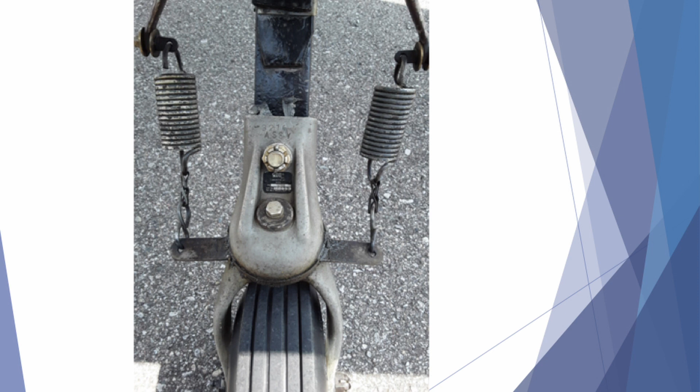Okay, so we're going to start back at the back of the airplane and kind of work our way forward on some of the items you need to keep tabs on and stuff that we've run into that's not really written in books anywhere. The tail wheel, the best one that works on the 108 is a Scott 3200 or an Alaska Bush Wheel 3200, either or.

And you notice the castellated nut holding it to the leaf spring. It's upside down from what the FAA teaches you. They want the nuts on the bottom. Well, according to the parts manual, according to Univair, the assembly drawings, that's how they want it. They want the castellated nut with a cotter pin on top so you can see it on a pre-flight. And where everybody else's has got a grease zerk up on that top cap, you see the head of the bolt. The best way to make a Scott 3200 work well is don't grease it.

If you pump it up full of grease, it's going to get too slippery. The clutch plates won't have any friction in them to dampen the tail wheel. So you get a lot more shimmy if it's over greased. What we do is about every second or third annual, it's up on milk crates anyways to get the tail up in the air to make sure everything is tight back there. We'll just take the wheel off, take that nut off, clean everything all out, blow it out nice and dry, and put a thin film of Lubriplate on it, put it back together, and leave it alone. And it just doesn't give you any trouble.

The springs have to have some play in the bottom. If you go out there to the airplane and both of the springs are under tension, then what it's doing is it's pulled the lock pawl loose, and your tail wheel isn't a tail wheel anymore. It's like a caster on a shopping cart. The whole concept with it is you got about 15 degrees travel either direction using your steering with your rudder pedals. Any more than that, if you want to break the tail wheel loose, you hit the brake and lock it up hard, and then it'll kick it off center and release it. But you want it to stay in trail when you taxi. Otherwise, it's a nightmare with a crosswind.

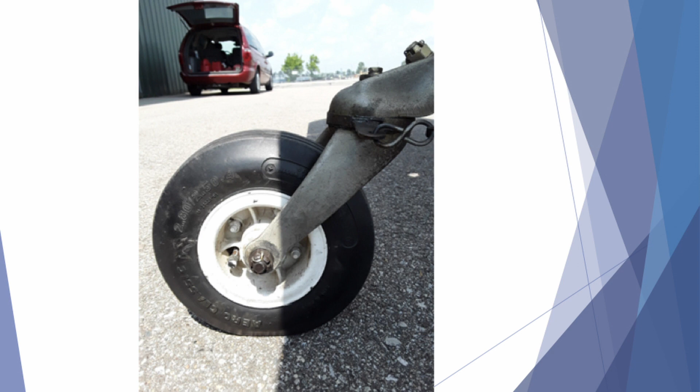The side view of it, you can get two tail wheel tires right now. The McCreary Chenuit, it's a sawtooth pattern. It's a real thin wall. They don't do well on a big tail on a Dash 3. You got to put 60, 65 pounds of pressure in them. If you get them down to about 40 or 45 pounds, it'll blow the sidewalls out of them.

This tire Desser Tire makes, if we back up, if you look at the tread pattern, how it's just the rib pattern like the main tires, that's the heavy duty tail wheel tire. Desser Tire out of Memphis sells them. They're about 10 bucks more than the cheap McCreary. On a small tail, you could damn near run it flat, not have any air in it. It's that rigid a tire. But I've not seen anybody blow one of those out on a Dash 3. It's got Desser's name on it? No, Desser sells it. Okay. You can look online on their website and you can see the tire options, and the Chenuit McCreary is about 10 bucks cheaper than that one. But it's a much better tire.

Dave, on my inner tube, the nipple is, I have to use a screwdriver to pry it back so I can get air in it. What did I do wrong? Did I put the wrong inner tube in there? Not really, they're tight on all of them. You got the little 90-degree stem that comes out of there, but there's not much room. What a lot of guys will do is when they're going to put air in the tail wheel tire, they'll put one of the extensions on it, hit it, and then take the extension off, put the cap back. Right, okay. Yeah, it's real tight to get a tire chuck down there. It's not uncommon to have to pry it over with a screwdriver and hold it while you put air in it. Okay.

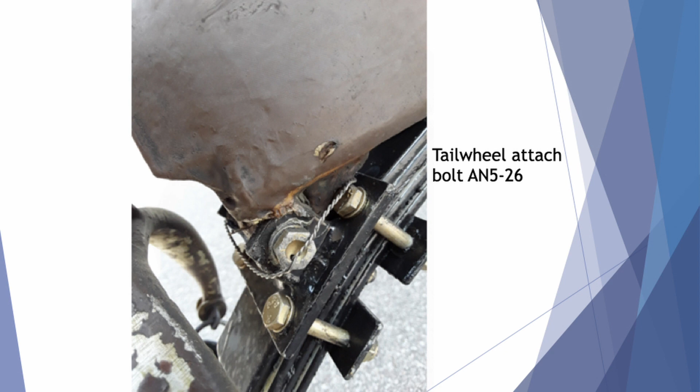Tail wheel attach bolt, an AN5-26. The manual calls out for a 25. The problem with that is the bolt has got no washers under it, so when you push the bolt through, the edge of the threads are right at the steel bracket, and it's like a meat cleaver trying to shear it. So by putting one size longer bolt in there, the 26, it gives you the room where you can put a washer on either side of it, and it gets the threads out of the way of the shear point area. Dash 3s are bad for it.

With that long arm and the big tail, you get a good crosswind. Imagine the side load you're putting on that little 5/16 diameter bolt. So what I did with it is I put the longer bolt, it's got the bushing inside. The trick with it is when you put it on there, the bushing inside is slightly wider than the gap. You put AN960-6 washers, a thin washer, thick washer, to shim it to where there's no gap where it won't slap side to side. If there's any play in it sideways, when you put a side load on it, it's just accentuating the arm and moment, and you'll pop the head or pop the tail off the bolt.

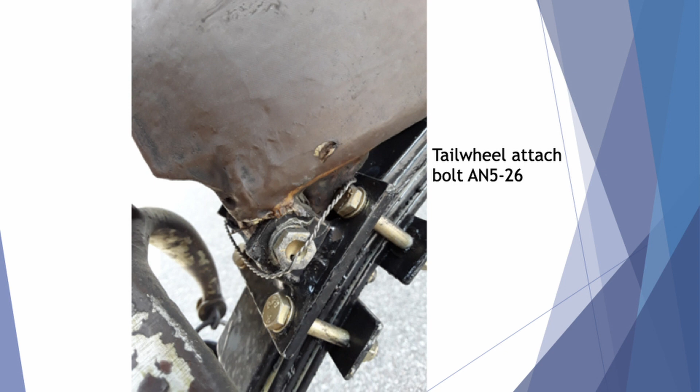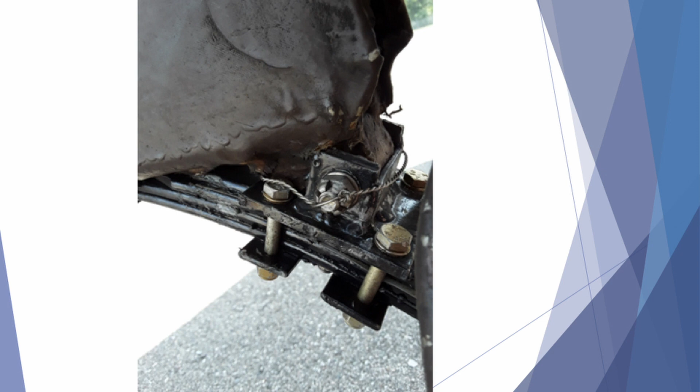The other trick that we figured out was if you drill the head, that's supposed to have a castellated nut on it, not a lock nut. So if you drill the head, you capture it through the head, start out on the side where you got the tail, go through there with safety wire, come all the way around, go through the head of the bolt, and then come around it and capture it back with the tail. So you've safety wired it completely with a ring like this.

So you go out, and if you pop the head on that bolt on takeoff, you're going to catch it on your next pre-flight walk around. You'll see it busted off there because it's held with a safety wire. And the safety wire being captured, it won't let the bolt come out of the hole, so your tail wheel is going to be there when you land. And yes, they have fallen off. We've had people call. The amazing part is, since we've been capturing them like that with a safety wire, we've never broke a bolt.

I just passed it around. You guys can take a look at it.

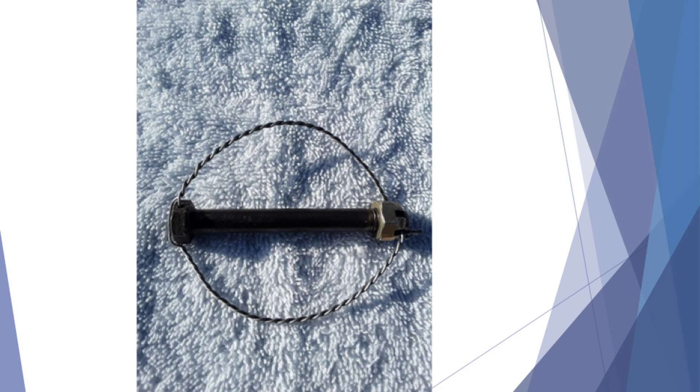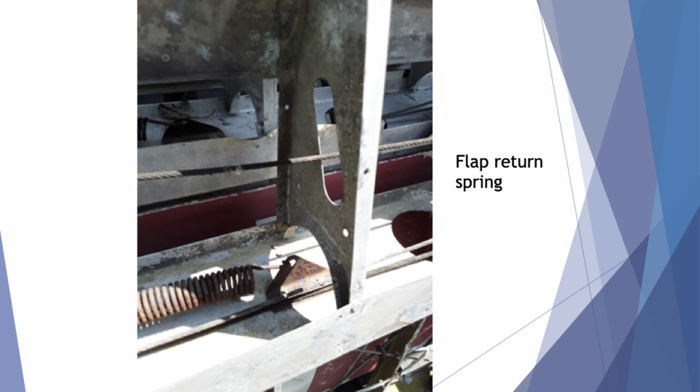Some of the areas when we're doing the annual that people don't look at: up in the wing behind the fuel tanks, you got a flap return system in it. There's a big giant spring. There's usually an inspection hole where the bell crank is for your flap rod to come out. You look in there with a light. The early Stinsons, 108, 108-1s, they were not forgings, they were weldments, and they just had a hole drilled in a piece of steel with the other end of that spring stuck through there. Well, after 75 years, the hole gets elongated, it saws through the spring. That's an area you want to keep an eye on.

Just go up there every annual and shoot some engine oil on it, just so it stays lubricated where you're not rubbing metal to metal all the time. If you get it to the point where it's sawed through the spring, it's an absolute bear to change. The other end of that spring is buried behind the fuel tank. There's no inspection holes there, and it's 24 inches from the fuselage. So you end up having to cut a hole back there, making some kind of a tool that you can pull the spring from the root end of the wing to draw it tight to get it up into the hole. You can see that through one of the holes with a borescope to see how the inboard end of the spring is holding up.

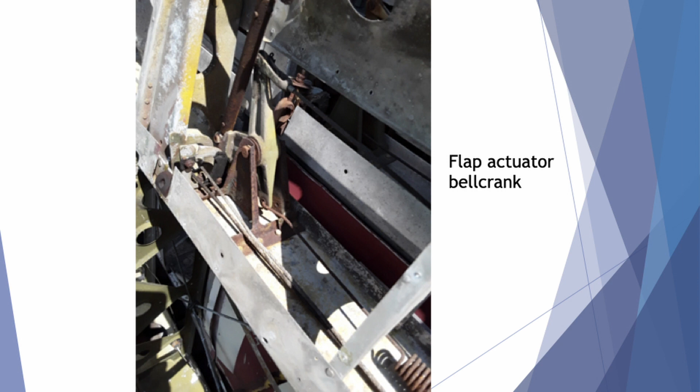Another area that's real common for corrosion. Back in the day, the airplanes used to be tied down out in the grass because there were no hangars. And like with every other tail dragger, the last 3 feet of the airplane was exposed to all the dampness coming up out of the ground, so the tails all rotted out of them.

Another area, a low spot, is the cluster right at the landing gear where the brackets are for the wing struts. So pull the streamliner fairings off when you do the annual and get in there and look for rust. It was bad enough back in the day that Univair made a whole cluster kit. It's like, hey, this thing is rotted. You'd buy it and it had about 12 inches of tubing already welded to it. Cut it out and section it in. They knew right where it was going to rot.

Most of the airplanes have been restored, epoxy primed, painted, kept in concrete hangars, so we don't get near the corrosion that you used to have with the airplanes. They're in a much better environment when they're not flying.

If you're ever going to go out and do it, is anybody in here looking at buying a Stinson? Everybody's already got one that wants one? Okay. Aren't we all looking for another one? No. Okay, all right. How many guys own a Stinson? How many guys have another project? There you go.

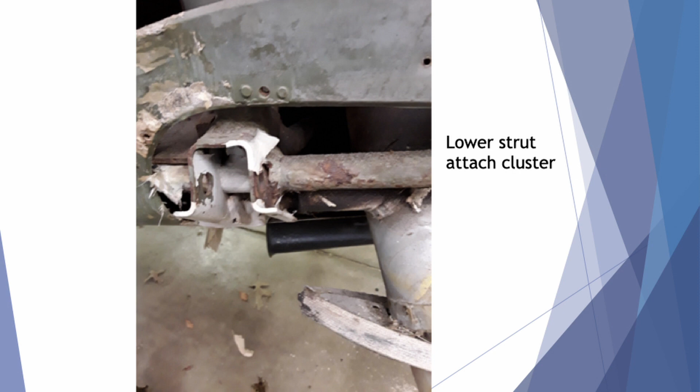AD note on the Stinson on the rudder cables on the pulleys. Originally they had a small 2-inch diameter pulley up under where your pedals are. Get that streamliner fairing off the landing gear and it's easy to see. Easiest way to tell, other than getting a tape measure and measuring it, they just went to a bigger diameter pulley. It's actually a Piper service bulletin for compliance. Piper took Stinson over in '49. The bulletin and the AD note came out in 1950, so that's why it's got a Piper part number for the service bulletin.

What they did is the small diameter pulley had a fairly tight radius where the cable changed direction. They had a tendency to wear in there. If you change that pulley, do you also have to change the cable? No. The cable's got enough play in the ends for the threaded turnbuckles where you can adjust it out. If you're gonna go buy an airplane, or you've got your airplane and you look in the logbooks and somebody signed that off, physically go look at it. I've seen 3 or 4 of them where the AD note's been signed off and they've still got the original pulleys in them.

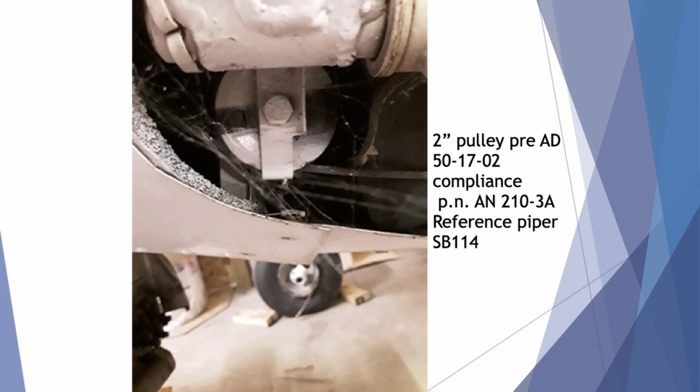Landing gear leg bracket. How many guys have ever broke these in their 108s? Almost everybody. You take it out and get somebody to weld it, or you pay Univair another $100 for another piece. I got tired of doing that, so I made one. Well, I didn't make it, because you can't manufacture a part, but I repaired it. Pass that one around. I did that probably 15 years ago, haven't broke one since.

I took the original bracket, used a real long stainless steel worm gear clamp, cut sections out of it, laid the old one out as a template, and then bent a new one out of the spring stainless steel and put floating box nuts on it with machine screws. So it's not rigid mounted, it's got a little bit of give to it, and I haven't broke one since.

Putting the new part on wasn't as irritating as trying to line it up and get the holes where they used to be. Yeah. I don't care how close you are with a Sharpie and putting marks, it just doesn't work. This one I actually went over the top.

I countersunk the inside and put screws on it that are slightly extended into the clamp, so when it's torqued up to the tube, if I did break one of the legs, I don't even have to take it off the airplane. I just undo the nut. There's enough friction there to hold the head of the countersunk screw.

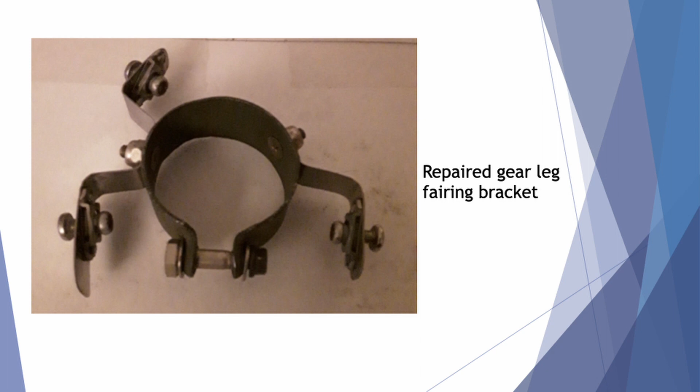Fabric covering over the gas tanks. Does anybody run into that? It's not illegal. Contrary to what people say, you can have fabric over the gas tanks. The AD note only applies to the Dash 2 and the Dash 3. Univair couldn't tell me why it didn't apply to the straight 108 and the 108-1.

You can put a 540 Lycoming and a small tail, go faster than any of them, but the AD note doesn't apply. Doesn't make any sense. But you can cover the top of the gas tanks. You cannot do it in a sock, one wing cover.

You have to cover the wing, have the fabric go down the bays with the gas tank out of the wing, go down, you attach it with the Pliobond, super seam cement, whatever you want to use for your covering process. The fabric has to be glued down into the trough around the spar, and then you put the tank in that actually holds the fabric in place. Then you can cover over the wing if you want it to look like it's a fabric covered wing.

What they were concerned about was if you just did the blanket method over the top and the gasoline got underneath the filler neck hole and lifted the glue, the fabric comes up off the wing and it changes the airfoil. Now you got a thick wing on one side that's all inflated, and you got a normal wing on the other side. There's also the chance of the air getting under there and eventually tearing the fabric loose of the wing.

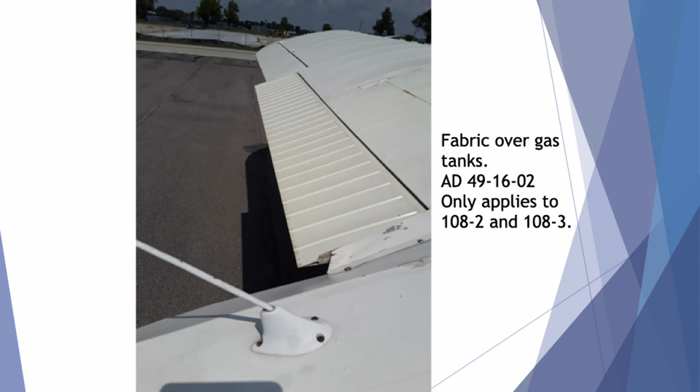So this way, if the fabric did depart the airplane, it's not going to make any difference because the structural part of it is all trapped by the gas tank. You don't have to disassemble anything to look. You can look through the inspection holes in the bottom of the wing, and you can see the trace of the fabric that's coming down and around the lip that's been glued in there. I think yours is that way, isn't it? Yeah.

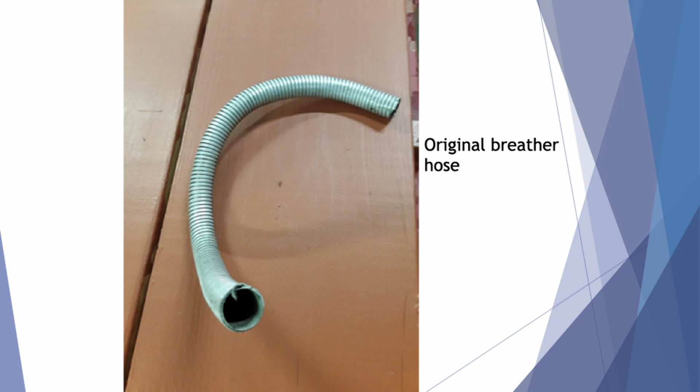Anybody got the original corrugated aluminum breather tube? Do you constantly get a little bit of oil weeping at the back of the engine? I get it dripping on the top cover where it comes out. Yeah, the breather's got oil residue going through it. That's porous. That's not a sealed tube. I don't know why they ever did that.

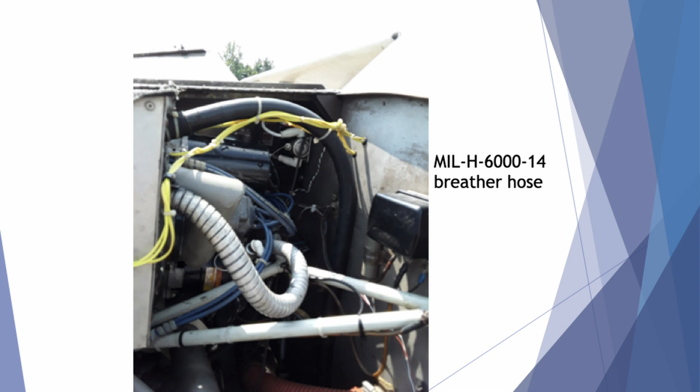That works really well for a blast tube on the generator, but that's about it. People chase oil leaks, and that's usually what it is. You run your fingers along the bottom of that tube and there's always oil there. Fix for that is MIL-H-6000-14, 7/8 ID breather hose. Get about a 4-foot length of it from Spruce or any of the vendors.

And the other trick with it is most people have the breather tube come out of the breather cap, through the baffling to the firewall horizontally. Well, the oil can't go uphill. So when you put the new stuff that's sealed, it doesn't weep, and you run it up just about to the point where the upper cowling touches it, it's going uphill. That's going to knock 90% of the oil off the belly away.

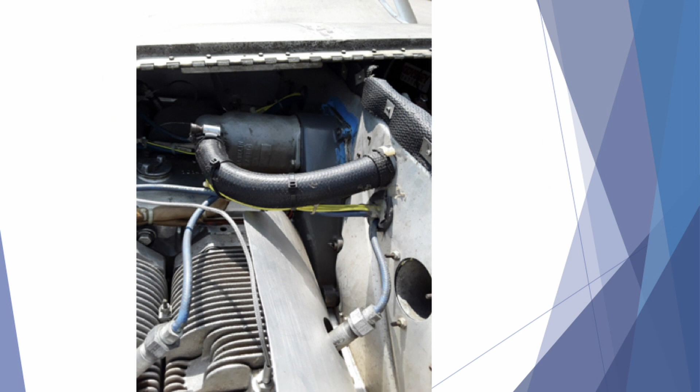That's the front coming off the breather cap. You can see how it's already going uphill when it goes through the baffle.

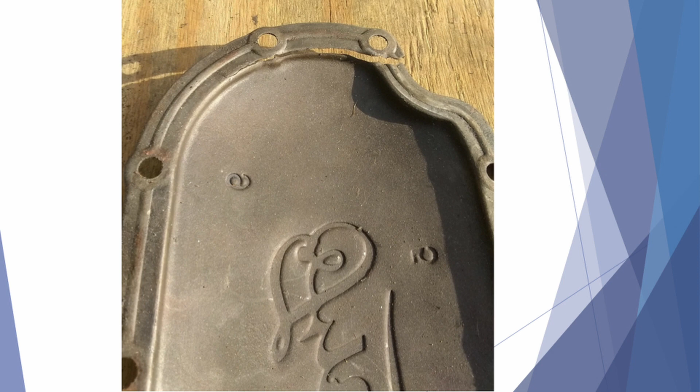A lot of prop seal leakage. People call up, need a prop seal. And it's like, well, where's it leaking? Well, it's on the windshield. How do you know it's a prop? Because the whole top of the engine's wet. This is an extreme top pan cover that we had come in. I've found them where we actually could not find the crack on the airplane.

If you think you got a prop seal, before you take anything apart, blow the top of the front of the engine off clean, take some white paper towels and duct tape them over the front section of it, and go out and fly the airplane for 20 minutes. Can't do it for 10 minutes because it doesn't get hot enough to open the crack up. We found this out. Go fly it for about 20 minutes, get it to operating temperature and heat soak.

The crack will open up, and you'll see the back of the paper towel is wet, the outside of the paper towel is dry. It's not your prop seal, you got a crack in the front pan. It's real common with them. We've probably changed a dozen of them over the years. Not quite this extreme, but they were the die marks from the stamping. It was a real tight corner, and eventually they just fatigue and they crack up there.

That was on an airplane we were working on, and he said he'd been chasing an oil leak for a year. Wow. But if you look at it, that hole where the pan gasket goes up underneath it, even if you have the silicone gasket, the crack is beyond it. So it's still gonna weep. But normally we'll see them where they're cracked about 2 inches, and we've taken them off the engine and you heat them up with a heat gun and you can actually see the crack open up.

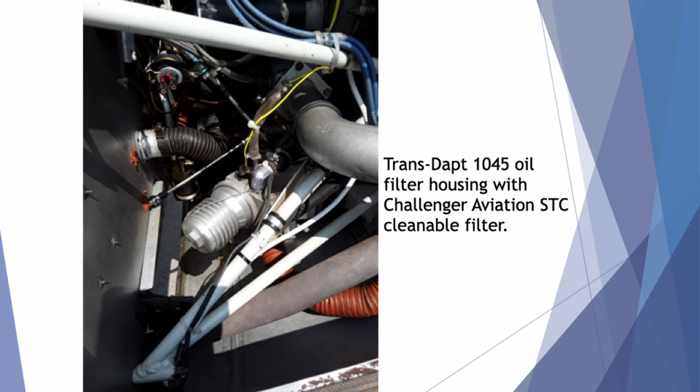My airplane has got a full filter system on it. I came up with it about 30 years ago, long before Airwolf was in existence, and Turbotech and Seaplanes Inc. had all gone bankrupt, so there was nothing out there. So I got a field approval putting a Trans-Dapt 1045 race car adapter on it. Guys are still putting them on. Jegs Racing sells the Trans-Dapt housing for about 45 bucks a piece. By the time you buy the fittings and the hose, you got about $250 in parts for the filter kit. So there's absolutely no reason you shouldn't have a filter on your airplane.

Takes a standard 3/4-16 thread filter, CH48108 or 109. About 5-6 years ago, Paul and I put the Challenger Aviation STC cleanable filter adapters on it. Spins on the same housing, same thing, did it with a field approval. A couple of the guys have asked Challenger to add the Stinson to the STC list. They can't do it because all the STCs that Airwolf has, and it's an airframe modification. All the STCs for the Challenger Aviation system are all engine mounted adapters.

Like if you got a Continental O-470, you take the spin-on filter off the engine, put this on it. It's an engine STC. By having a remote filter that was never part of the type certificate data sheet, it's an STC product. That's an airframe modification, so they can't add it to their engine STC. But the guys have been doing it with no problem with the field approvals. As long as they get one that's previously been done by the FAA, get them a copy of the 337, and their FAA seem to be good with it. It's always been a PMA part, just not STC'd for that application.

If any of you guys are looking to improve your engines, put later model parts in it that we'll get into in a little bit. If you ever run across a helicopter engine core out of the Army, most of the parts in that will fit the 165. Some of the stuff fits the 150. The heavy connecting rods, the heavy rockers, the sodium cooled exhaust helicopter valves, all the bulletproof parts that you can put in a 165 to make it a better engine, they all come from that engine.

So if anybody ever runs across one, out of a vocational school somewhere, somebody had one laying in a building somewhere, and you can buy it, the cylinders, the crank, and the case will not fit. Everything else does. They're all the same parts. It's just that's all the later model parts. They're all the updated stuff.

What are we gonna do here, Brett?

There we go, thank you.

So they're 6V335 or 6V4200 is the designation on the data plate.

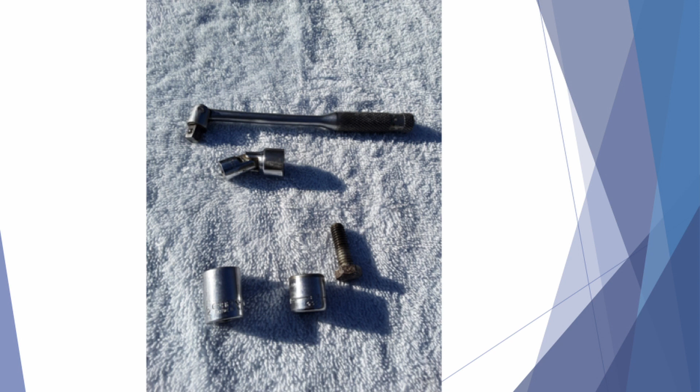We'll talk about some of the tools. How many of you guys work on your own airplanes? Yeah, most of you, okay. I know, you got a Lycoming, you don't have to work on it.

There's a handful of special tools that you need to do the normal maintenance, like upper end maintenance, I guess you'd call it, on a Franklin. Intake manifold, the bolts are buried. You can't get up there with a normal socket and a normal wrench. Snap-on makes tools that will fit up there just like they're made for it. The quarter-inch flex socket, half-inch, a breaker bar.

You can take a half-inch Craftsman socket, grind it down so it's a shallow socket. That's pretty much all you need to get the manifolds on and off. Without them, you'll fight with it for 2 or 3 hours. If you got the right tools, 5 minutes, it's off or on. Simple.

That short socket, yeah. There's nothing special about it. A 6-point Craftsman, grind it down as shallow as you can get it. You grind it down to where the head of the bolt is in the socket and you have no more material beyond it, just so you're getting a full grip on it. And that's just about the right depth.

That's how it goes up into the manifold. On the right side, you got a breaker bar with a little short socket to break them loose. 12-inch extension on that quarter-inch drive flex socket. It rips the bolts right in and out of there.

Lock washers. You got star locks and then you got split locks. The factory manual calls out for the star washers on the right. They work well in most applications. On the intake manifolds on a Franklin, they're not worth a hill of beans. Pass some of these around. The split lock washers have a better grip.

There's no steel washer or anything except the head of the bolt and that star washer going into an aluminum casting. The heat and contraction cycles and the vibration, they come loose to the point where when you change oil at 25-hour increments, you go around and look to make sure the bolts are all still in there and you hit them with the socket, check them for tight. Since we started using the split lock washers on it, we've never had one come loose. We don't even think about it anymore.

When you make contact with that washer, you've got to go almost a full revolution on that bolt to get it to bottom out where you're tight. So the star washer, it'll vibrate to the point where it'll chew little knurls into the manifold and it's loose, which causes the most common roughness in a Franklin, an intake leak.

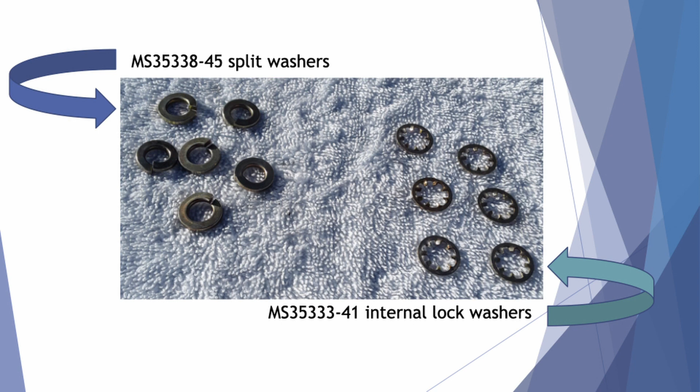Lisle Tool made a push rod remover tool for Franklin. They called it for a big block Ford lifter, but it just happens to fit a Franklin. Jegs Racing bought the tooling. There's one if you guys want to come up and look at it. It's a slide hammer. It's got an expander on the end of it. You put it inside the lifter tube, turn it about 3 turns till it's snug, and the slide hammer just pops the push rod tube out. You don't damage anything. And they only get about 35 bucks for it.

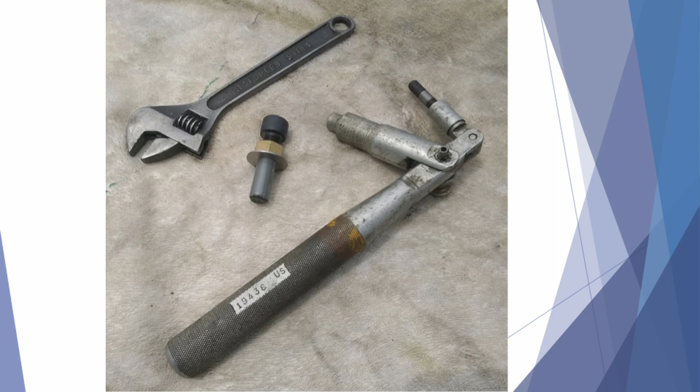Everybody's talking on the website about getting factory original tools to work on their engine. That's all wonderful, except the factory tools were built for the military. I'll pass this one around. Weighs about 4 pounds. You want to carry this in the airplane in the toolbox? This is the official Franklin push rod tube installer. Threads onto the rocker stud up at the top. Use mechanical leverage, pushes it in. But it's heavy.

This is a 1/2-inch bolt with a stainless steel washer and a nut. Weighs probably a couple ounces. It's about 7 bucks in parts. I got a bunch of them here. I get 10 bucks a piece for them. That and an 8-inch adjustable does the same job as that. You can throw it in your toolbox.

Jack Stewart's coming. I think he's supposed to do stuff on lifters and push rod tube installations. I'm going to give him one of these and he can show that as well.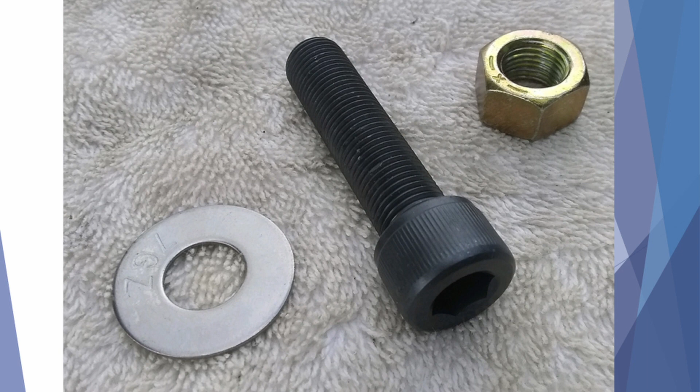That's what it looks like disassembled. Real simple. What we do is we get the socket head bolt. We found one that was just the right diameter, put the nut and the washer on it with a piece of shrink tubing. The shrink tubing protects anything from scratching the inside of the pushrod tube shroud, and it just slip fits in, absolutely perfect.

Put the pushrod up, drop it in the hole, use the adjustable wrench, adjust the jaws to 5/16 to match the diameter of the stud that holds the rocker in. You just use your mechanical advantage, it just pushes it right in, simple.

The tool on the right is the original factory pushrod remover. Really, really complex. That Jegs Racing tool does the same thing. A lot of the guys have gone beyond that, and they cut the T-handle down and just put it solid to the point where they can put it in the pushrod tube, and they just use an adjustable wrench over the rocker stud and use the mechanical advantage and pull it out. Then it's a real small tool, you can just throw it in your toolbox with you. All this military stuff is huge and heavy and steel.

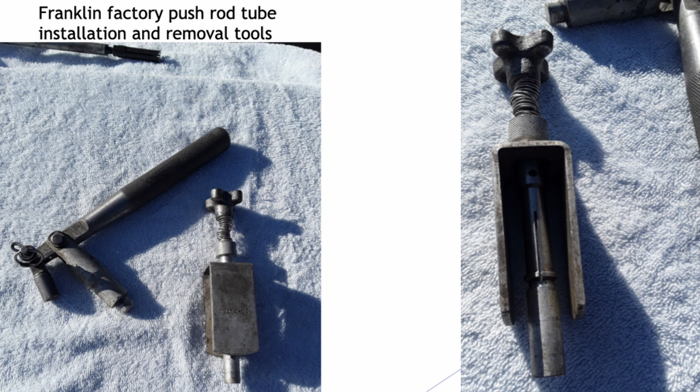This is one that one of the guys was watching us, we're messing with it last night, pulling a pushrod tube on one of them. That's what we call the holy grail of pushrod tube removers. It took me about 10 tries and I got it. This one, I machined the parts, goes in the tube, thread the center rod in, then there's another nut on top of the housing. You just run that nut down with a box end wrench and it just pulls the tube out through the center of the tube.

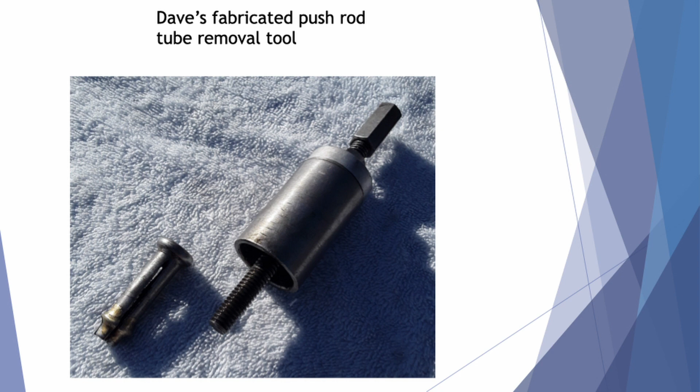Another factory Franklin tool. The guys are asking about what do you guys do about bleeding the lifters? Check the dry clearances. Well, this is the factory tool. I think it weighs about 6 pounds. A little overkill. All that does is you collapse it, put it underneath the rocker arm, between the rocker arm and the head, release the pressure, and this giant spring forces the lifter to collapse.

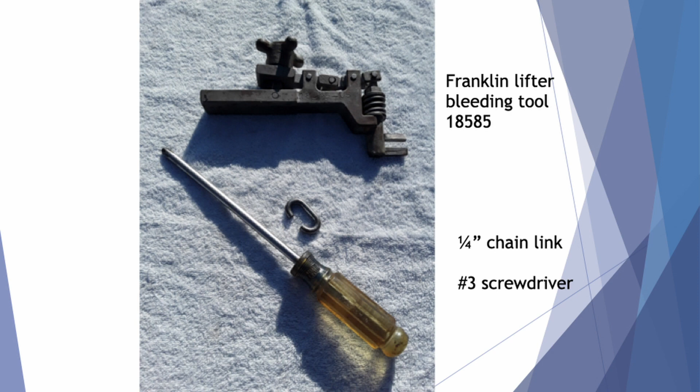It does okay. It's so big though, it won't get up under the front cylinders when the cowling's on it. 1/4-inch piece of chain link and a 12-inch #3 screwdriver does the exact same thing. Same thing, it's in your toolbox. You don't even know it's there.

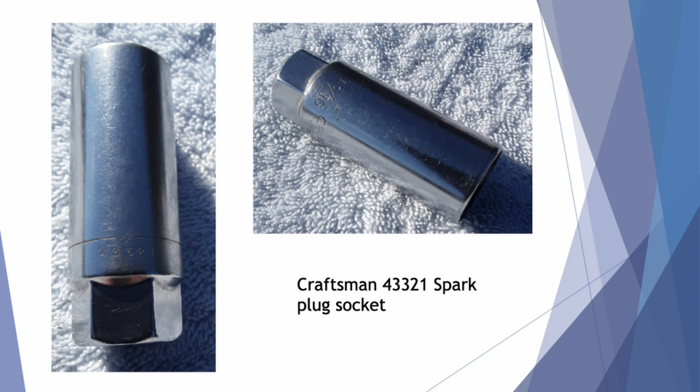Craftsman socket. It's an old part number socket. I don't even know if they're in production anymore. There's a handful up here that we've picked up. It's the only socket that we found that's deep enough reach to work on the 18mm Franklin spark plugs, but it's also got a hex at the end of it, so it'll work on that top right front one up under the grill that you can't get a socket and a wrench in. You can drop that on it, go in there with an open end wrench and crack the spark plug loose. Real simple.

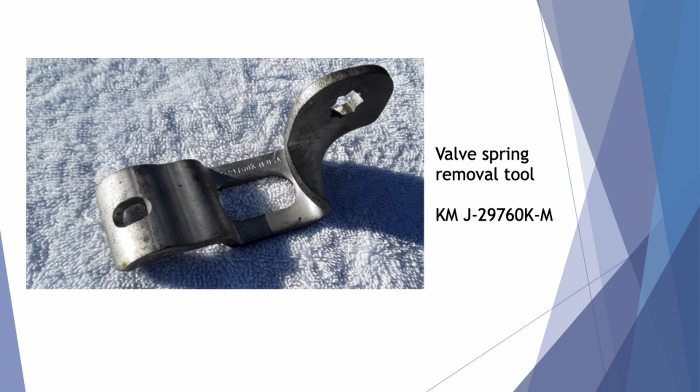We're talking about the tools. There's a lot of specialized tools for doing lower end maintenance when you get into pulling gears and pullers. All the upper end stuff, like if you got to pull a cylinder off, send it out. If you got to pull a cylinder and pull the valves out of it and have somebody grind and change them.

I got one here I'll sell you, Mark. You don't have to take pictures. Get that wallet out.

This is for a General Motors Buick V6. It just happens to fit a Franklin like it was made for it. Same. It's like Franklin made these elaborate military tools. This does the same thing. 3/8 drive. So you can just take your ratchet or your breaker bar. That gives you the leverage, goes under the rocker, and you can pull the valve springs out.

A lot of times you get one where you got carbon or something under an exhaust valve and it's like, I don't want to send the cylinder out just to get that done. The local mechanic can fix it if he had the tools. Well, that tool with a block of wood in the center of the cylinder on the vise, you can pull the valves out and he can grind and lap everything and put it all back, and that tool's like 25 bucks. All this stuff, I mean, you could get a whole set of upper end working tools to maintain that Franklin for probably $200.

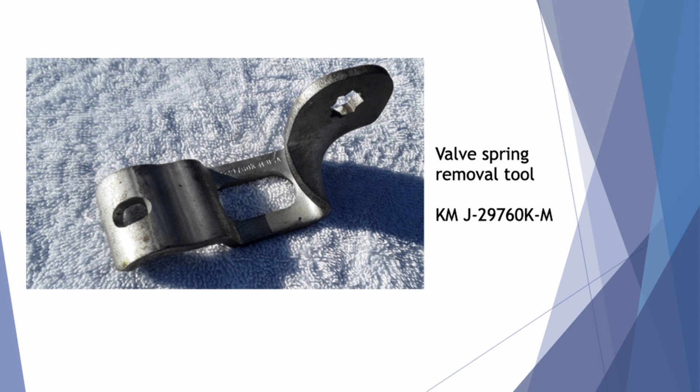Somebody made a bunch of those pushrod installers. I think they're selling that tool for $200, and it's still 4 pounds of ballast in the airplane.

Brett? Oh, there we go. We're back again. Yeah.

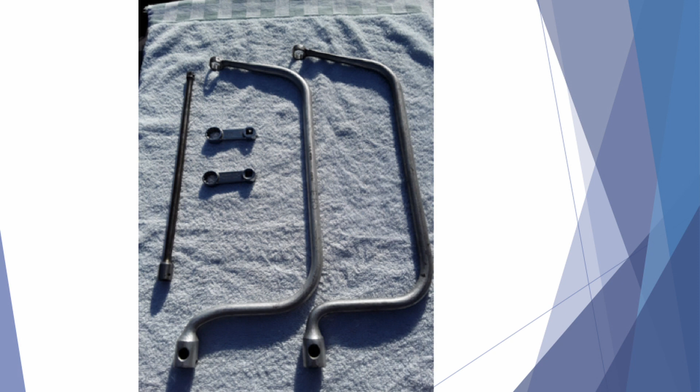Cylinder base wrenches, same thing. Everybody wants an original set of cylinder base wrenches. You can compare them, I'll pass these around. These are Snap-on torque adapters. FRES 18 and a 20, 9/16 and 5/8. This and that 12-inch extension will take any of the cylinders on and off that engine and torque them.

Those big cylinder base wrenches, proportional to the size of these, you can see. They're not going in your toolbox. They're too big. They also will not get the bottom cylinder base nuts if the engine's in the airplane. The engine mount gets in the way. Those cylinder base wrenches were designed when they were overhauling the engine and it was up on a stand with nothing else on it.

These will do the same thing. Snap-on truck gets 65 bucks a piece for them plus taxes or whatever. We've been picking them up. I've got 3 or 4 sets of them here. We get 100 bucks for the set. The cylinder base wrenches, I think they're getting a couple $100 a piece for them, but they won't work when the cowling and everything and the manifolds are on the airplane.

We're just trying to come up with a bunch of simple, normal, generic tools that you can put in the toolkit and you got everything covered. You're not trying to hunt up tools. Seems to be the hardest part with dealing with the old airplanes is not finding somebody to do the work, it's having the parts and the tools to do it.

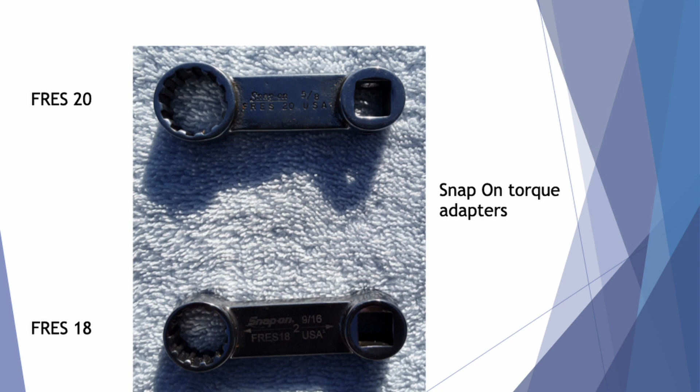How many of you guys have seen the curved wrenches? Back in the day, they were called a manifold wrench. They used to use them on the old cars. It's a Snap-on CX1820. Use that in there. That'll get any of the cylinder base nuts off a 150, 165, 180. It'll break them all loose.

It's a real thin wall. It's got just the right angle. You can use the torque adapters, take them on and off. They're plenty strong enough. This will break all the nuts loose. Then you can finger them off. The torque adapters will get you to your torque setting to put them back on again. Same thing, it's a standard off-the-shelf Snap-on wrench.

Lost it again, Brett. Oh, there we go. Keeps coming in and out.

How many of you guys have ever checked your cable tensions on the airplane? What did you use for a tool? Borrowed an expensive one. The $1,500 one in the wood box. Yeah. You can buy these for less than $200. They're designed for sailboat rigging. Little tool, works real well.

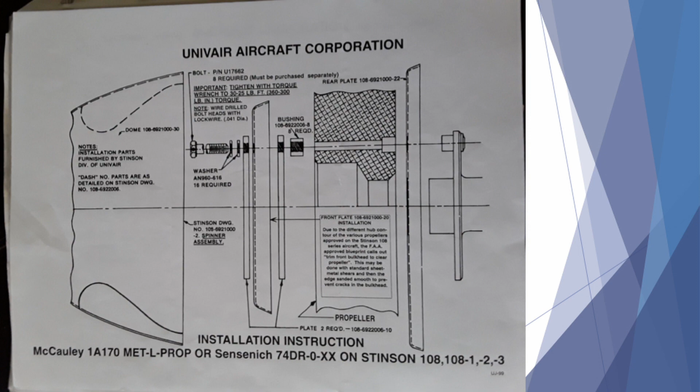They revised the drawing a while back. It used to require 51 thou safety wire to safety the prop bolts. They revised it to now 41 thousandths, which is standard wire that most mechanics have got in a box. The original service manual calls out the torque specs for the wood prop. In that original manual, there were no metal props back then. So they published this bulletin, and this is for the McCauley or the Sensenich metal props. That's the torque spec.

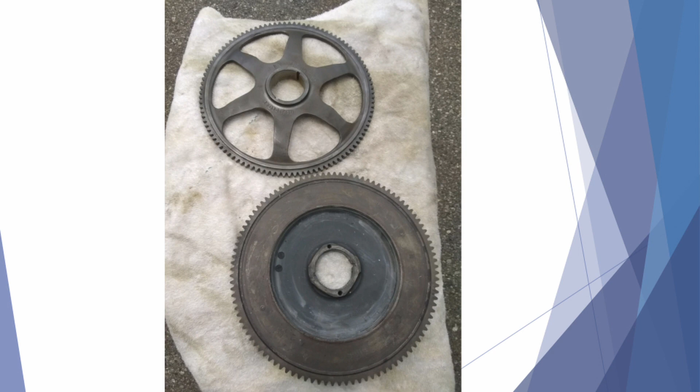Top is the starter ring gear for our engines. The bottom is a torsional absorber out of a 180 or 220 Franklin. I got FAA approval and approval from Franklin in Poland that I can put a torsional damper in a 150 or 165. You get rid of the harmonics range on the tachometer.

You'd have to go through flight testing and a bunch of engineering garbage, but it eliminated the vibration range of the metal prop. I can put feet on the floor on my airplane and sit there and go in and out of that range. You feel nothing. It's gone. Guys are talking about putting a new $4,000 prop on, doing this, go back to the wood prop.

It's been proven the wood props are not as efficient aerodynamically as the metal props for performance. The metal prop will flat out outperform a wood prop. That's why they quit building them. They went to metal. The problem with the harmonics is it's not necessarily a harmonic on a tail dragger that cracks the crankshafts. I don't believe that, contrary to what a lot of people do. What we found cracking the crankshafts is people running them into things.

A Cessna 170 has the same propeller on it, a 1A170, DM7654, O-300 Continental. And you go look at the failure statistics on those crankshafts and those engines, and a 172 that had the same crankshaft, the same propeller, they have no failure rates. But the 170s, they do. Well, what's the common factor? It's a tail dragger. They keep running them into things. And we've documented it in logbooks that after 3 prop strikes, the crankshaft will break.

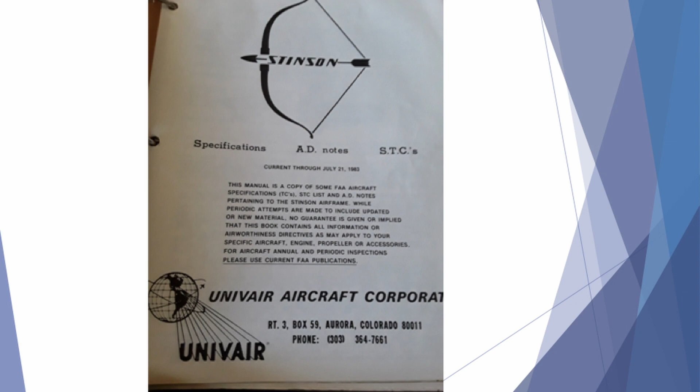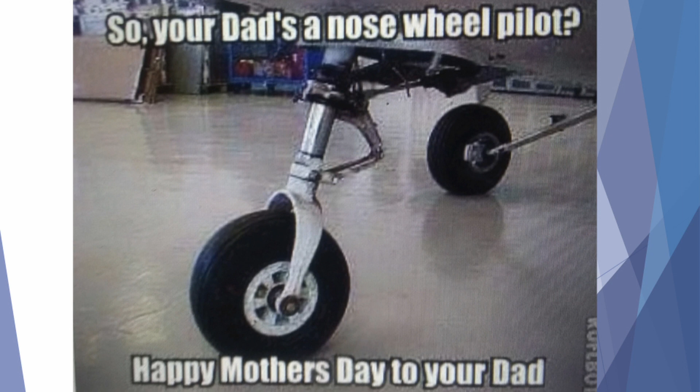We've got a guy just new to the group, Jonathan Whitaker. He just bought the Tri-Gear Stinson down in Oklahoma, the 108-3 with the tricycle. I sent this to him. He says, all right, that was fair enough.

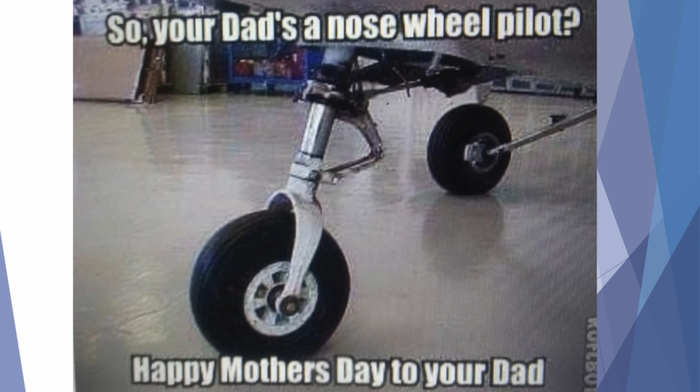A couple other things we've got that weren't in here. Let's see here. How often do you guys pull the magnetos out of your engines and look at them? Not just check the timing at annual. Notwithstanding when it quits and it won't run. This is an impulse coupling out of a Bendix mag, came out not too long ago. Customer sent it in, said, well, it's running fine, I just need it looked at. And the mag hadn't been out of the airplane in 20 years. So when we pulled it apart, it was full of oil. The oil seal had failed years ago, but it failed to the point where it lubricated the impulse coupling spring. The impulse coupling spring, I don't know how it still worked.

So we tell the guys this is every 5 years, there's a service bulletin from Slick, there's another service bulletin from Bendix, I think it's Bendix service bulletin 643. It says every 5 calendar years or 400 hours time in service, take the mag off, inspect this, this, this, and this. It's a simple check. You pull it apart, change the oil seal, look at the points, check it for any oil inside, clean it all out, put it back together, set the E-gap angle, put it back on the airplane, and it'll run 100% better. If you stay ahead of it like that, it's never going to let you down when you're 1,000 miles from home on a trip.

Landing gear, the oleos. How many of you guys have ever had the oleos out of your airplane? Did you change the bolts in the bottom? Yes. Okay, here's some of them that we've taken out. Some of them, no documented history, the original bolts were in there. And not one of them we've ever taken out went back in the airplane. There's one here that you can actually see it's bent.